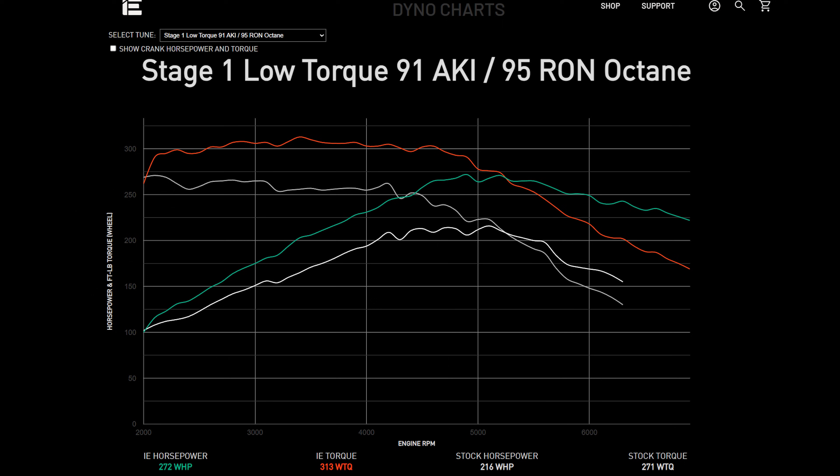If you guys are familiar with the channel, you know that the last video I put out in this vehicle, I was at the drag strip and I tested out Integrated Engineering's Stage 1 91 file, as well as their Stage 1 93 file, and tested it back to back against the stock calibration on this car. And we saw how much quicker and how much faster it went with just a tune.

Today, we're going to see how much of a difference it makes as we raise the ethanol level on this car, on the dyno, same day, same conditions, and see how much power we can actually gain.

So I've been lucky enough to enjoy this software for some time now. It's probably been about a month and a half I've been driving on this Trueflex file. It has been a blast. The throttle response, way better. The power, way better, especially running E versus 91.

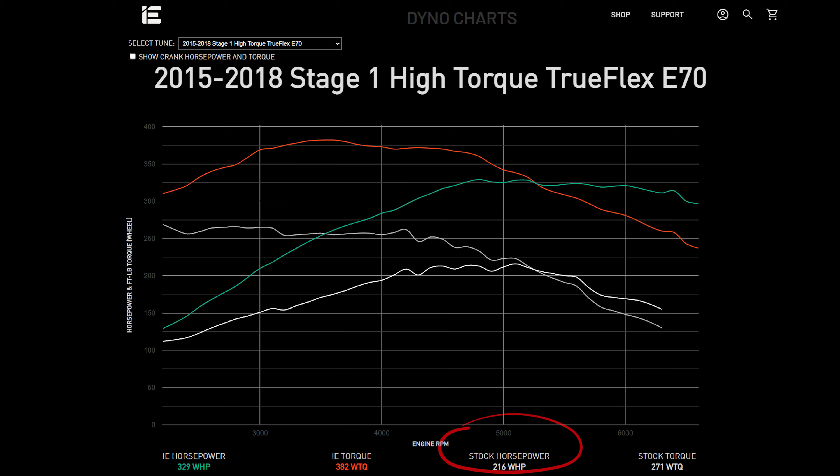So what we're doing right now is we're flashing the car back to stock and we're gonna get you guys a baseline. Then we're gonna flash the car back to the Trueflex file and we're gonna start ramping up the ethanol content. The first run will be on straight 91 and then we'll slowly add more E and see how much more power we make.

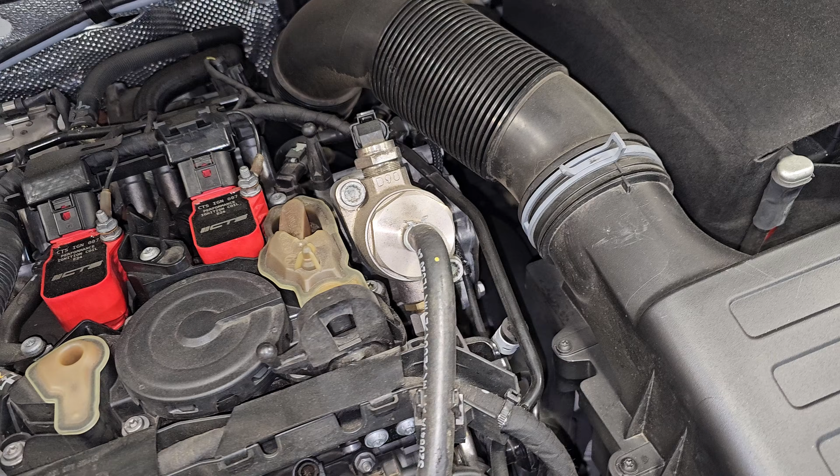Now, in regards to this software, you do need a little tiny bit of hardware to make it work as well. The piece of hardware that you need to upgrade so that you can run this Trueflex software is your high pressure fuel pump. In order to be able to read your ethanol content, you also need to install an ethanol content analyzer, which fits here on your fuel line.

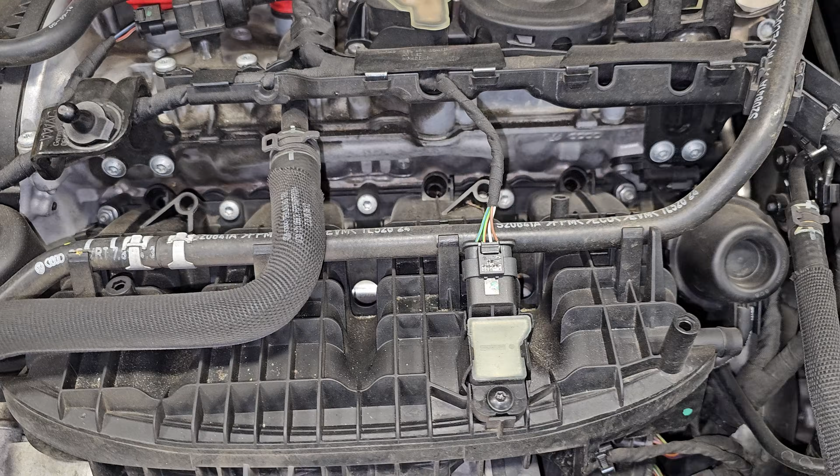This is the entirety of the high pressure fuel pump upgrade kit, which includes the tool they supply you to perform the upgrade on your existing pump.

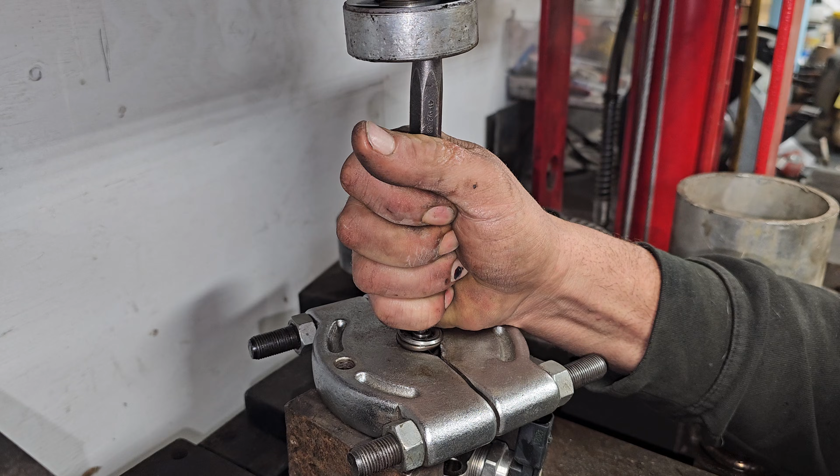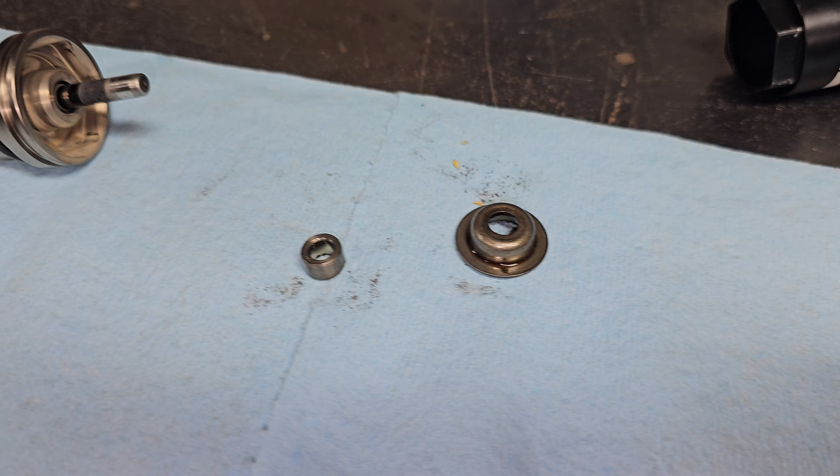Kyle made short work of removing the old plunger from the fuel pump and upgrading it to the new plunger from IE. Once the new plunger has been installed, Kyle reinstalled the spring that he originally had removed from the pump. This is the extent of what he removed from the OEM pump and upgraded with new parts from IE.

Now that the high pressure fuel pump has been upgraded, we need to install the Flexfuel sensor. Here is the entirety of what comes with the kit from IE.

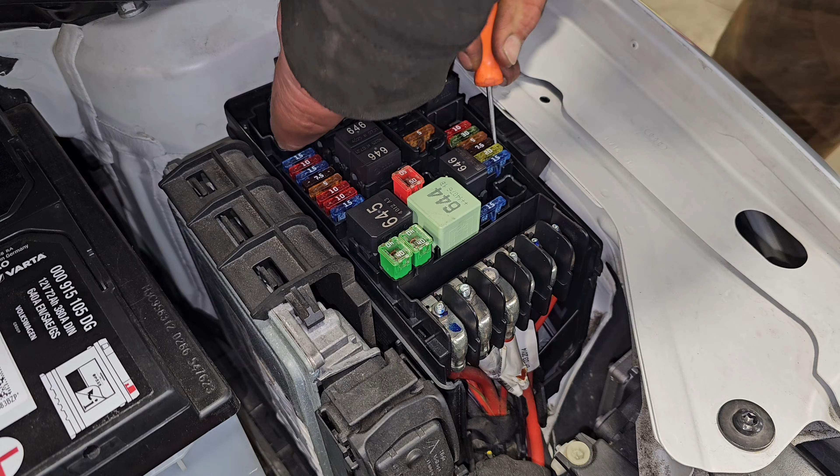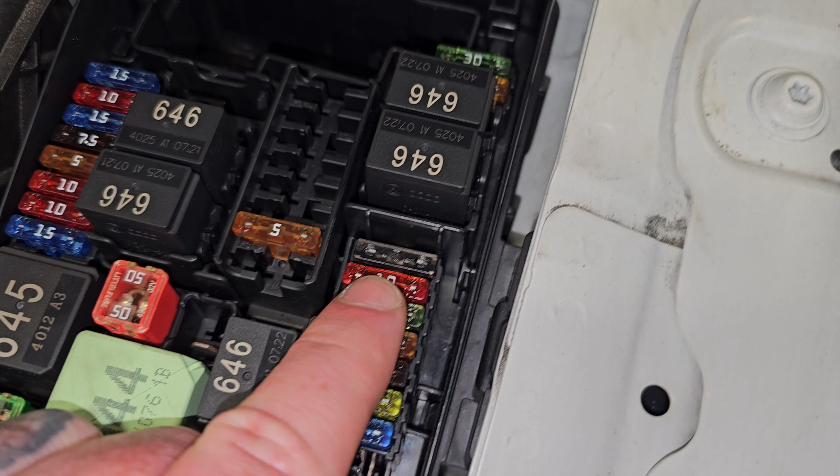The first thing you have to do is remove the fuse box. Then you have to remove the OEM ground so you can install the additional ground included in the kit. There is an empty spot in the harness for you to insert the pin that comes with the kit. Once you have completed that, you have to install the supplied fuse into the fuse box like so.

Then you're ready to add the flex sensor. The first thing is to cut a space for it in the fuel line by removing a section of it so that you can click it into place in its spot on the manifold. Once you have it in the correct space, you can tighten it all up.

Here is a shot of roughly what the wiring should look like once you have it all successfully connected.

Lastly, we toss the battery tender on to maintain the proper voltage for tuning and flash this bad boy to stage 1 with the high pressure fuel pump Trueflex file.

Last thing I'll note before we get to these first dyno runs, I just wanted to mention we do live at sea level here. It is very cool today. The air is very dense. So all of the power figures we see today should be quite high. These are uncorrected numbers on this Mustang all-wheel drive dyno with a smoothing level of 6, and I'm going to be showing you DynoJet calibrated numbers. Let's get to it.

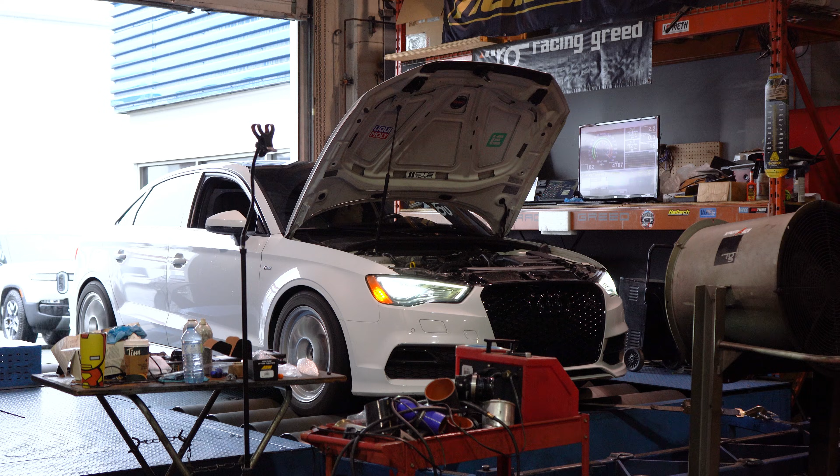So the stock runs are done, and I just wanted to give you guys a little bit of knowledge on dyno results and kind of how they vary from one dyno to another, from one location to another location in the world. There are different calibrators that make software for the Audi A3 platform, and 5 different ones have made multiple different power levels and different torque levels at the wheels on their dynos, as much as 27 wheel horsepower and 26 wheel torque from one dyno to another.

Just keep in mind, guys, that these results are pertaining to this dyno and this dyno alone. What we're really gonna be focusing on is how much we gain from the beginning of today to the end.

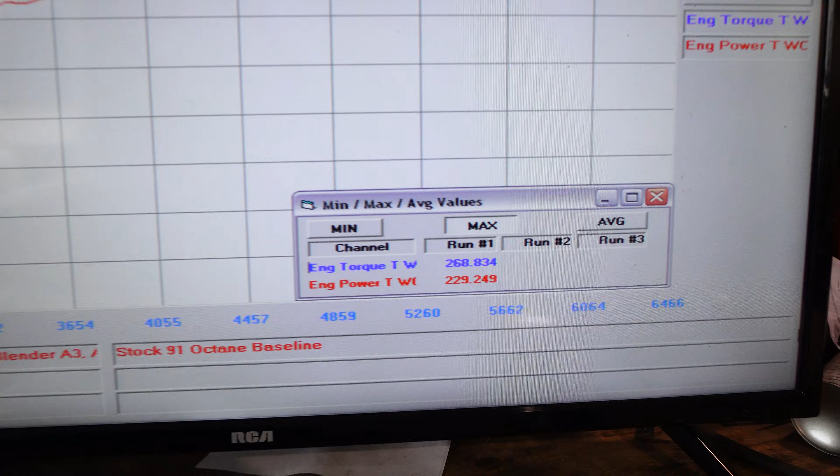Here are the results for my stock run, and here's our starting point for today, guys. Completely stock, running 91 octane fuel, 229 wheel horsepower, 268 wheel torque, a very boring, mundane looking graph.

We're definitely gonna spice that up a bit by flashing the car over to Stage 1 Trueflex from IE. What I have here is Integrated Engineering's very cool mobile app, and we can see the straight 91 octane fuel has 7% ethanol. That's what we're gonna be using for this first run on the dyno, straight 91 octane.

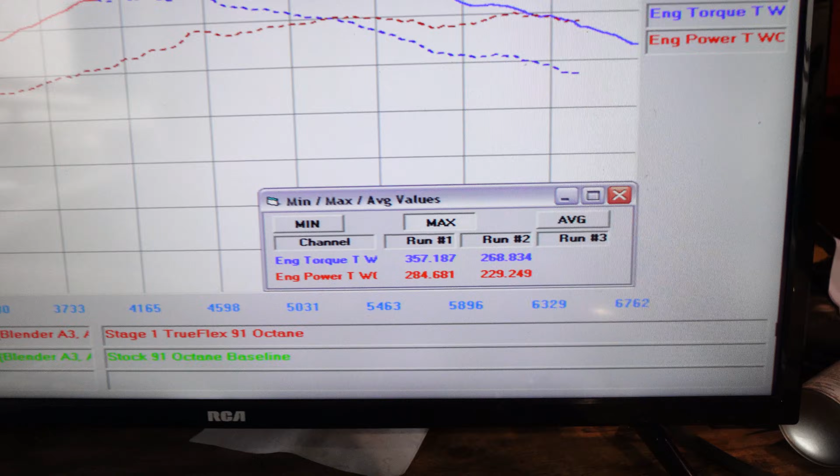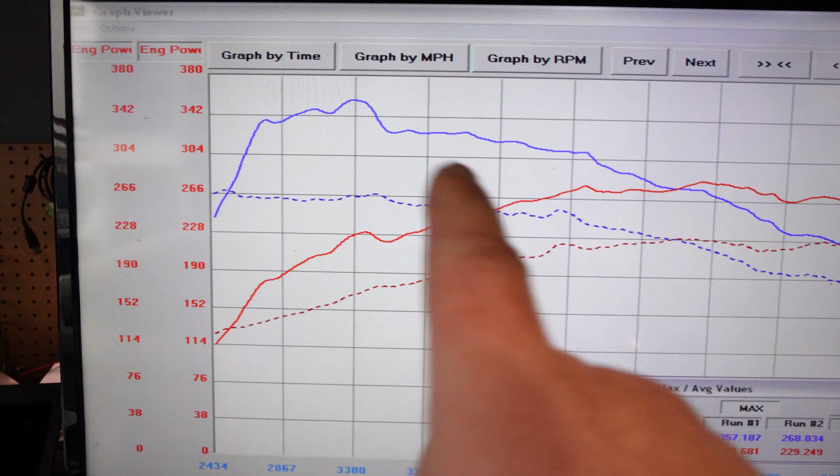Now on straight 91 octane pump gas with an ethanol level of 7%, we managed to gain 55 wheel horsepower and 89 wheel torque with just that tune, the high pressure fuel pump, and the flex sensor installed. Massive gains of torque down low and in the mid-range, and the horsepower, good gracious, just way higher throughout the entire pull. Let's add some more E and see how much more we can keep gaining.

So we've dumped in a bunch of E85 to bring up that ethanol content, and we are now sitting at 32% ethanol. We're gonna see now how much additional power we can make running a higher ethanol content.

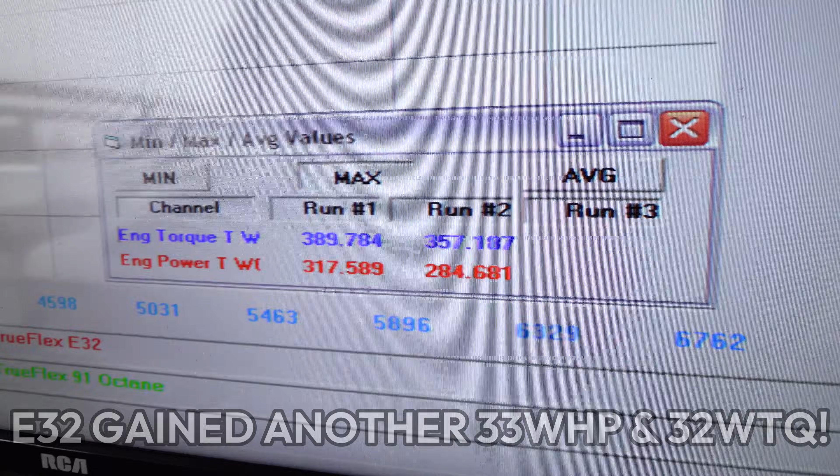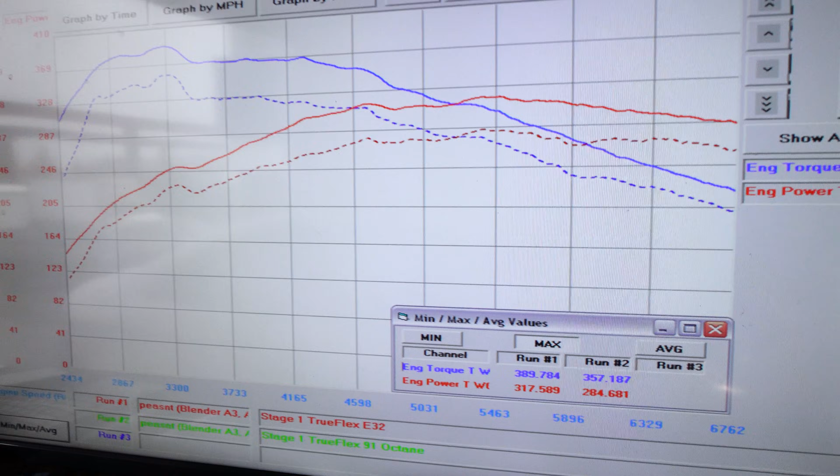Ramping that ethanol content up to E32 netted us a gain of 33 additional wheel horsepower and 32 wheel torque. It's also smoothing out the pull, a lot smoother, more linear as we added additional ethanol. We're gonna keep going, 2 more levels of E until we get to the peak horsepower at the end of the day.

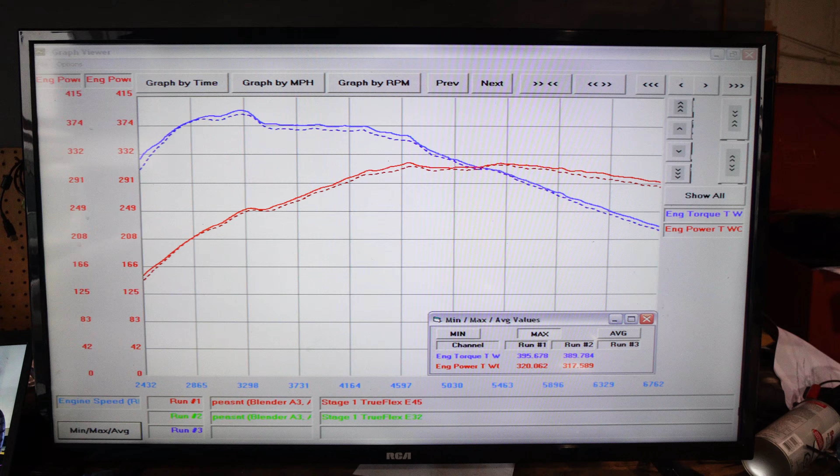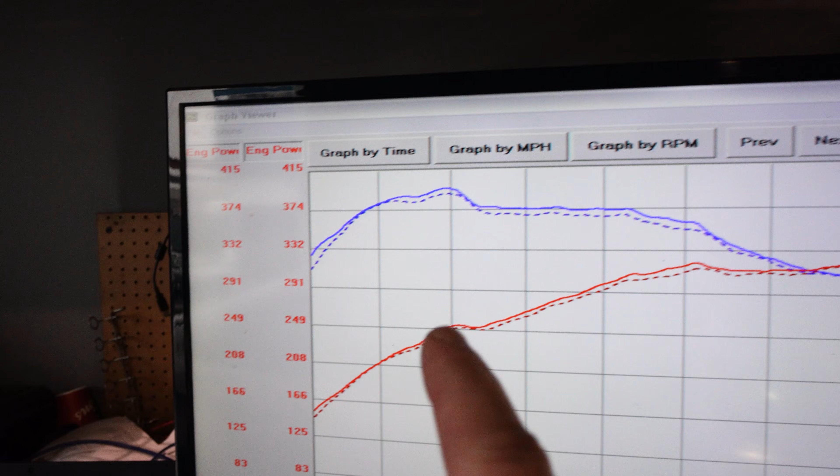With a little mini gain of 3 wheel horsepower and 6 wheel torque, that's what happened when we ramped up the E content from E32 up to E45. There was gains throughout the entirety of the pull, not just in one spot or another. So cool to see that it did make additional power, but not as much as we were hoping.

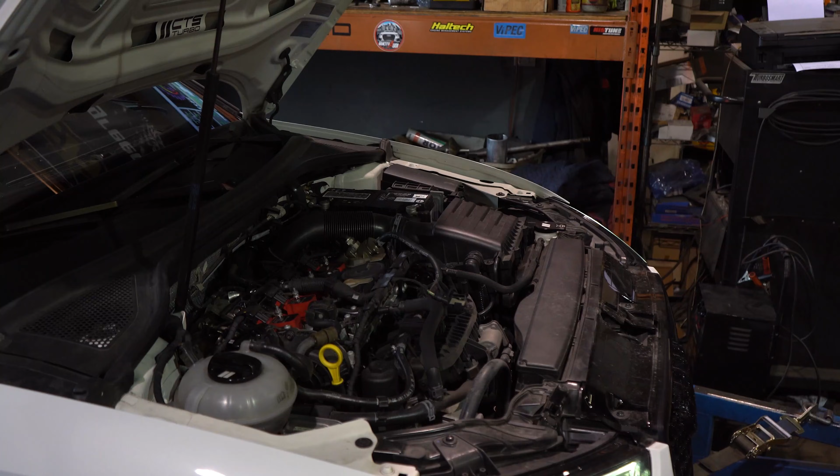Last runs of the day are gonna be above E60. The final results running E62, I gained 5 wheel horsepower and 13 wheel torque above the E45 result. You can see yet again gains throughout the entire pull.

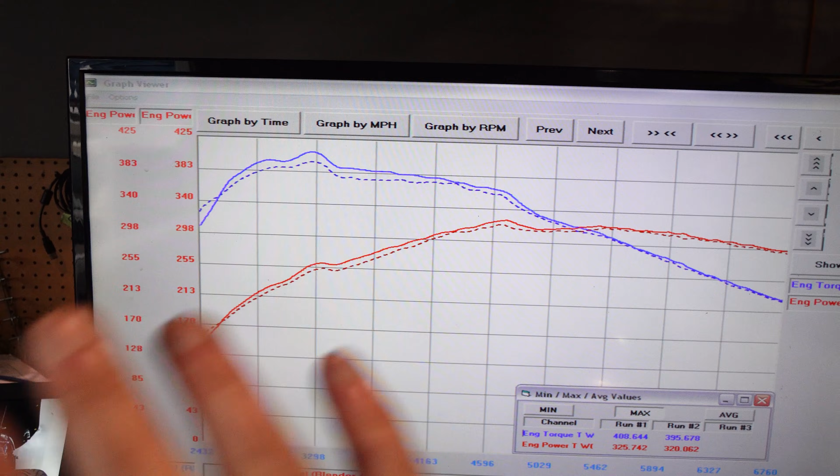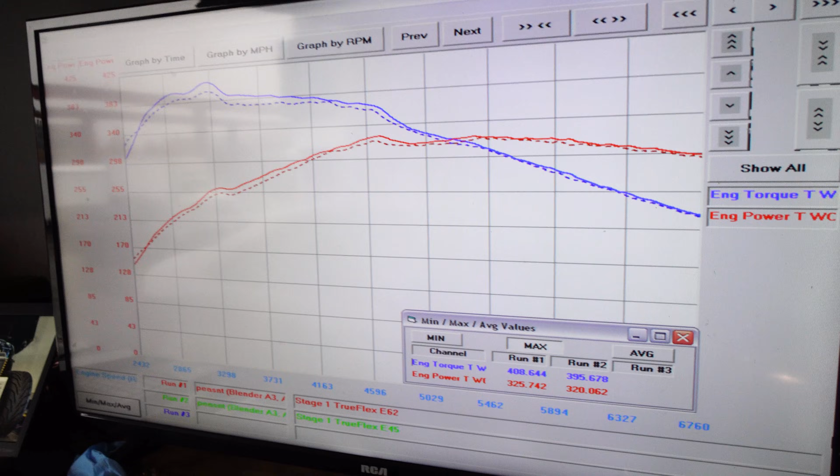It's not just one place or another, but throughout the whole thing. Most notably down low, the torque down low is where you see it, and for the horsepower, down low and mid-range, but still one hell of a gain step by step as we go up through the ethanol content. And I'm sure the final graph of the day is going to knock your freaking socks off.

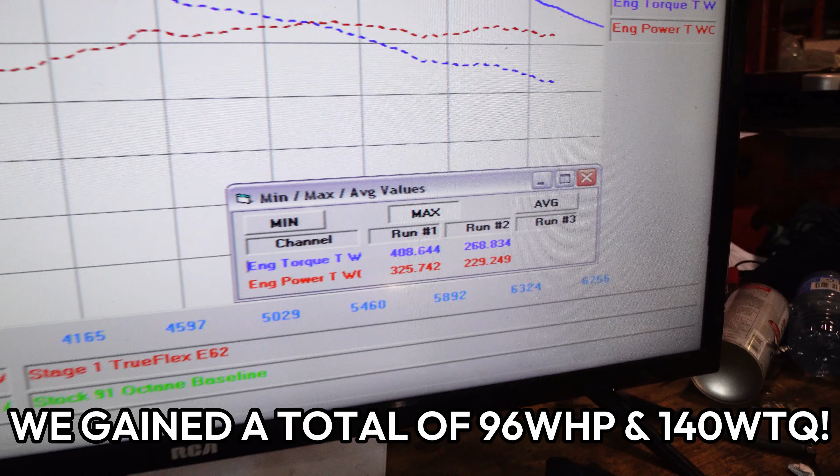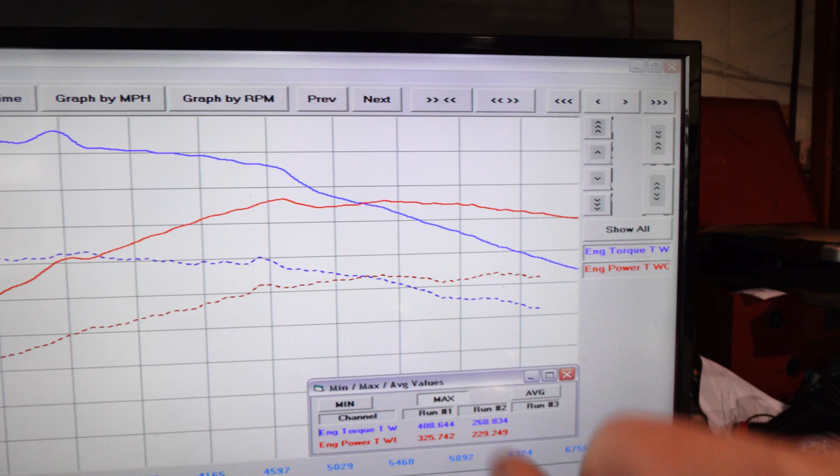From stock to E62 Trueflex, 96 wheel horsepower gain and 140 wheel torque. Look at the gains, just unreal. Revs out to 6,800 rather than 6,500, and just huge gains throughout the entirety of the power band.